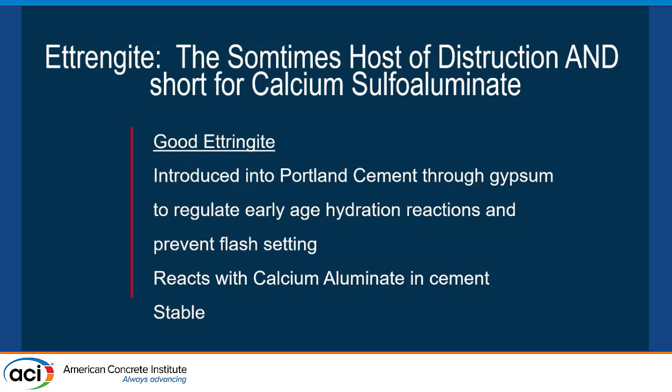The gypsum in the Portland cement reacts with calcium aluminate in the cement, and it produces a very stable form of ettringite. So what I wanted to do is show you - I really like looking at ettringite in blown up view because it really just looks like a bunch of needles and they orient different ways. It's kind of very distinguishable, so you know when you have ettringite.

And actually, a lot of times when you look at concrete, if you've taken a concrete sample from the field and you look at it under a microscope, you'll typically, if there's any water anywhere near it, see some ettringite in the air voids, or sometimes even in the cracks if there's water anywhere near it. And this stuff is okay. It's there. It doesn't really hurt or help the concrete.

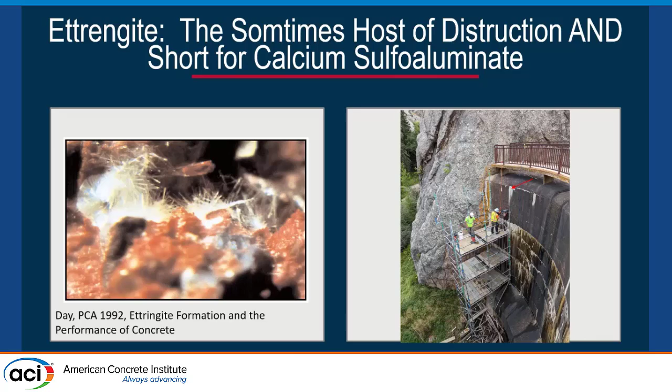Now, I was going to write bad ettringite, and I've been corrected so many times in the last 6 months that we don't have bad things, we have challenging things. So I'm just going to call this challenging ettringite, okay?

So the exact mechanism, and smart people in the room may disagree with me on this, but I don't think we 100% understand totally what the mechanism is that causes ettringite to become, I'm just going to say, the bad ettringite, okay? At a high level, what happens is it goes into solution when the concrete is curing, and it kind of hides itself. And your structure can be around for like 5, 10, 15, 20 years, whatever. And under the right temperature and under the right moisture conditions, that ettringite is not stable, so it comes out of solution and it starts growing. And it's like a freight train without any brakes. There's no stopping it. So these crystals form, and they kind of explode the concrete from the inside out.

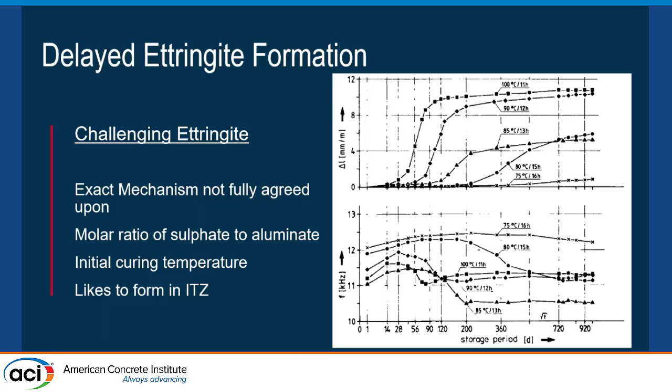But I'm not really here to talk about all the nooks and crannies of DEF. Really, I'm here to show you how we look at it and how it's impacted our specifications at ACI.

So when I started doing mass concrete, I was so confused. I was looking in 207, which is the mass concrete document. Where does it say I need to limit my internal temperature to 160 degrees? Well, it certainly is nowhere to be found in 207. It's in 301, specifications for concrete construction. Now I know that for certain, but it's kind of funny that you have to remember it.

So in section 8 of 301, there is a mass concrete section, and among other things, it says that the maximum temperature of concrete after placement shall not exceed 160 degrees Fahrenheit. This just changed. For many years it was 158 degrees Fahrenheit, because if you convert 70 degrees Celsius to Fahrenheit, it equals 158, but we just rounded it up. Most people do, some specifications don't. We're not making pianos, 2 degrees doesn't matter.

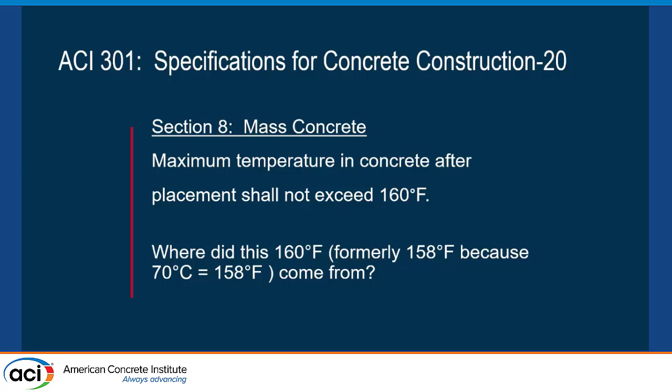So where did this number come from? As far as I can tell, the Bureau of Rec has been working on dams from before we had cars, but I'm not going to worry about the Bureau of Rec. All the documentation that I looked at pointed to this document from Heinz and Ludwig, published in 1987 in a special ACI publication. That 160 degree internal temperature limit is based off of this publication.

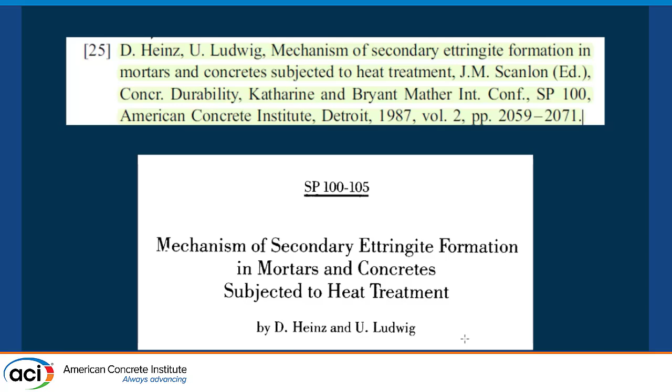What these guys did is they found out, or somebody told them, or they were privy to information that precast heat-treated members that had been exposed to moisture were showing excessive cracking. So they're like, I wonder what's going on here.

And they made a bunch of mortar prisms. They stored them for 2 hours at 70 degrees, followed by 12 hours storing at from 60 degrees Celsius, which is 140 degrees Fahrenheit, to 100 degrees Celsius, which is 212 Fahrenheit. They also looked at the sulfate to aluminate ratio, and they looked at curing after the 12 hours at an elevated temperature. They put the samples back in a 70-degree room, and they looked at the effect of different humidity levels on the expansion in those samples.

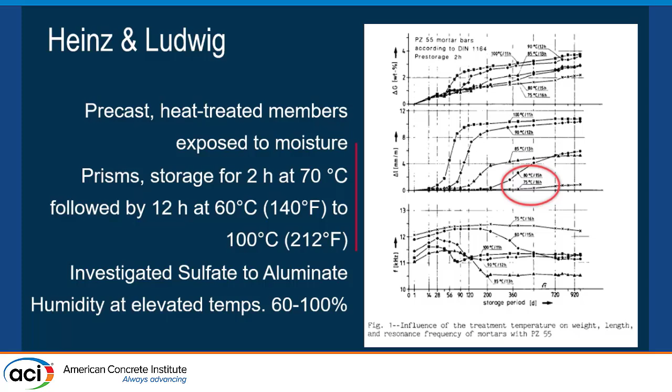Now I wanted to show... concrete is really boring when it behaves, right? It's way more fun when it fails or when there's some sort of distress. I mean, it's not fun for the owner, and definitely not for the contractor, but definitely for the likes of me and a lot of you in this room. So this is from a publication, a RILEM publication, from 2002.

They realized that most of these structures, when they were poured, got over 80 degrees Celsius. So that's 176 Fahrenheit.

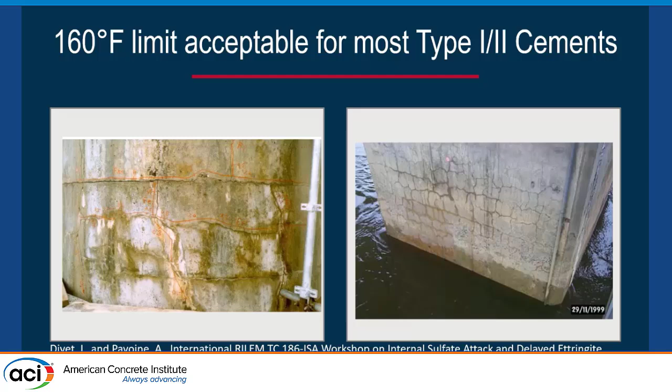Okay, so we were all great with 158, 160 degrees. Then 201 came along and threw us for a loop. I mean, I actually really like this provision.

They're giving us a little bit of a way out in the mass concrete world for the maximum internal temperature. What this does is it allows an increase of the maximum internal temperature from 160 to 185 degrees Fahrenheit in concrete. We'll say mass concrete, but really it's any concrete.

If a certain percentage of the Portland cement is replaced with either slag, fly ash, or metakaolin, and a little bit of silica fume - but we're really not sure about silica fume, we're going to throw it in there anyway. That must have been a huge discussion. Glad I wasn't there.

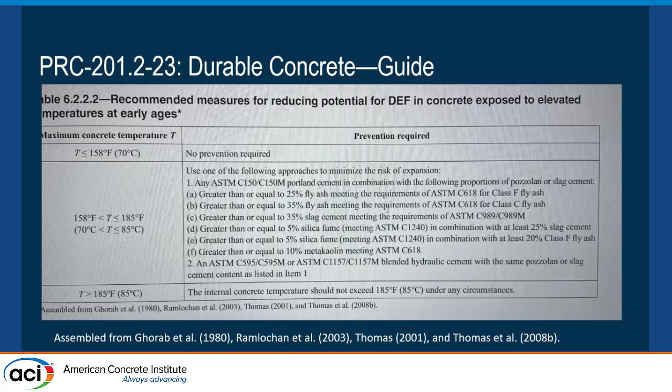And really quickly, and if I pronounce this wrong, is it Ramlochan? Okay, you guys are mumbling, but this guy...

2003, so there had been some observations just in general that if the concrete had a substitution of any portion of the Portland cement with fly ash or slag, there typically wasn't DEF. There were some really good examples where the contractor had started off using 100% Portland cement concrete, and then halfway through they realized the concrete was getting really hot, so they switched in some fly ash. Then 10 years later, you have this really good example of mass concrete that is experiencing DEF, and same mass concrete with a little bit of fly ash that's not experiencing DEF. So, hey, we're onto something here, right?

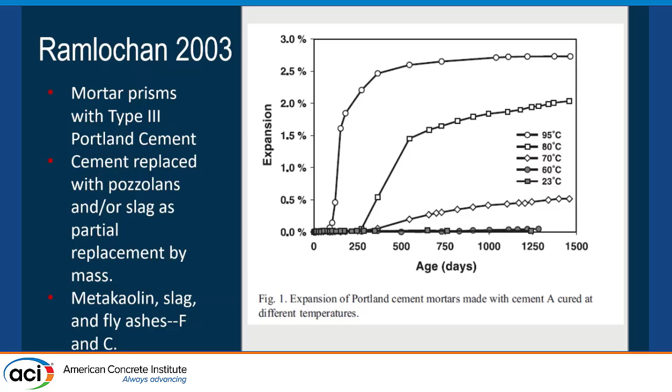I'm kind of running out of time, but I just want to say that this gentleman's work, along with others, showed that the percentage replacement of metakaolin, slag, and fly ashes - and he considered different kinds of fly ashes: low alkali, low sulfate, high sulfate, moderately high alkali content, and high alkali content fly ashes, class C, and then some class F fly ashes that had low alkali and sulfate. So he looked at a lot of different substitutions.

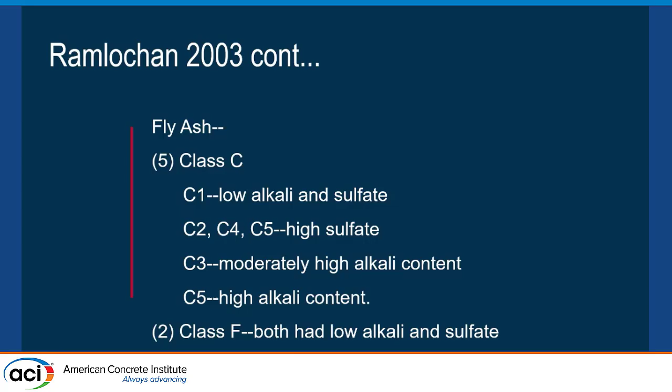He found that you want to put at least 8% metakaolin - and again, silica fume, not really that effective, but we'll let it sneak in there - slag at least 25% replacement, and fly ash between 25 and 35% replacement. With these, you can increase your internal curing temperature limit to 185.

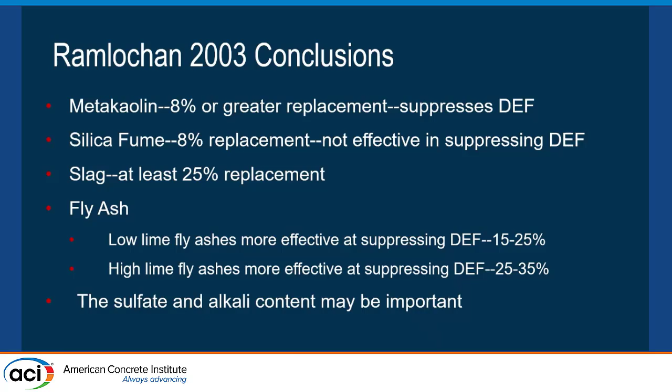Just really quickly, Thomas put out this paper in 2008, although it's based on an occurrence of bridge piers that were built in 1980 that by 1990 had experienced severe DEF. He had taken cores out of the bridge piers, then tried to recreate the concrete from the bridge piers in the lab and expose them to high temperatures and high sulfate curing environment, and then just lime water. This is the situation where I think they had built some of the bridge, and then realized it was getting really hot, so they put in the fly ash. So, unbeknownst to the contractor and everybody involved, it was a really great research project.